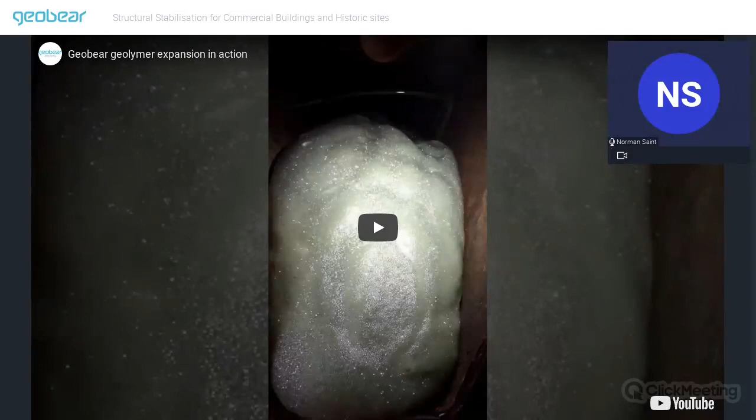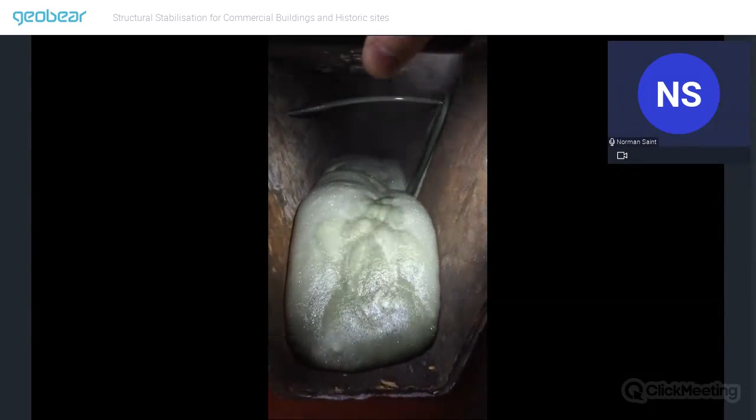There's the geopolymer, and it's what we call the liquid state, and there it starts creaming. And then we get that expansion. It's that expansion that you can see there that runs into the voids on the loose ground. Obviously, that was free rise. In its captive state, it becomes more dense. So it's only a short video, but it shows how the geopolymers work.

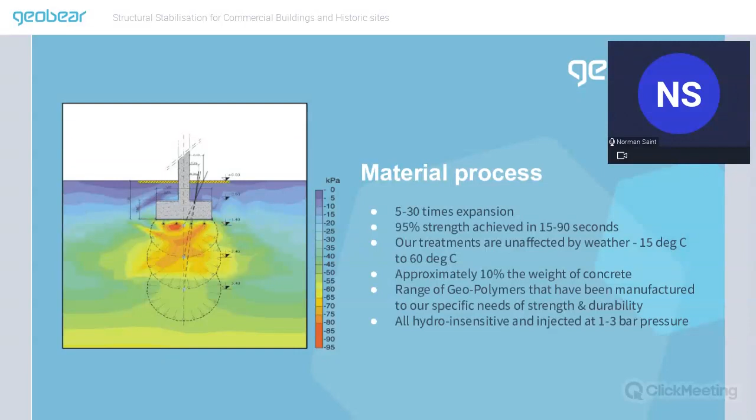On this particular project for the silo, we were given a specific target strength of 20 kilonewtons per meter squared to achieve by the client. The target depths we identified at 3.5 meters below the foundation. And on this project, we would verify that the ground improvements has been achieved by a heavy dynamic penetrometer test, or we could do various other tests, core samples, etc., depending on what the clients have specified.

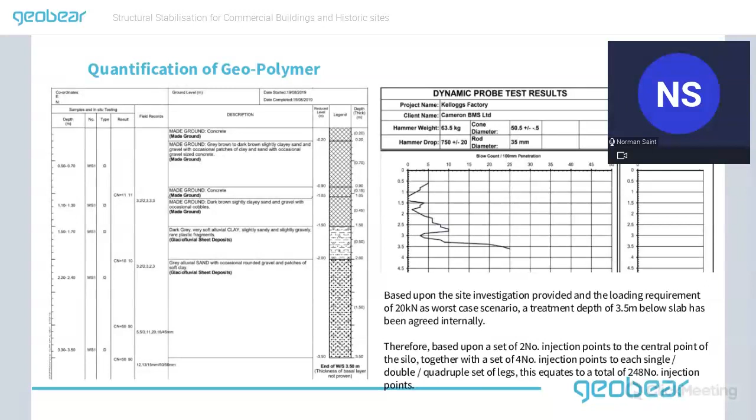But as you can see, that's typical site investigation. I'm sure you've all seen them before. On the left side, we've got the depths of the treated soils with a description of what the soils are. And on the right, we've got the dynamic probe test results pre-works. The post-works obviously would have been much stronger than that. So that's a typical SI that we'd ask for on most projects, not all projects, but ideally we would like this. And it helps us form our design for the projects that we work on.

Here's our first project, which, as we mentioned before, it's Seaton Delaval Hall. This is a grade 1 listed country house on the coastline in Northumberland. It's situated between Seaton Sluice and Seaton Delaval, if you're familiar with that area. And it was designed by Sir John Vanbrugh in 1718 for Admiral George Delaval, hence the name. It's now owned by the National Trust and more recently has been open to the general public.

Over many years, beneath the hall, the soils have been compacted beneath the structure, and also leaking drains had softened the soils, washing away some of the fines. A solution was required that would remediate these soils without any excavation or damage to the historic building. And following a number of engineering meetings, which I was involved with, a detailed proposal was delivered by Geobear, and our non-intrusive geopolymer injection was chosen.

We were required to improve the strength of the ground beneath the foundations to the west wing of the historic house, where significant cracking and movement, both internally and externally, could be seen. The site investigations revealed various treatment depths ranging from 1.5 to 7 meters below ground level. And our geopolymer material was injected at 1 meter intervals around the affected areas.

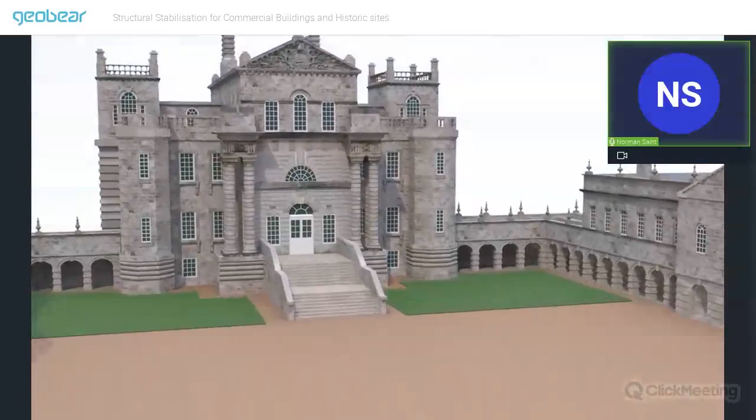There we go, and there's the colonnades, and the treatment beneath those was 7 meters. Then we went round to the rear of the building.

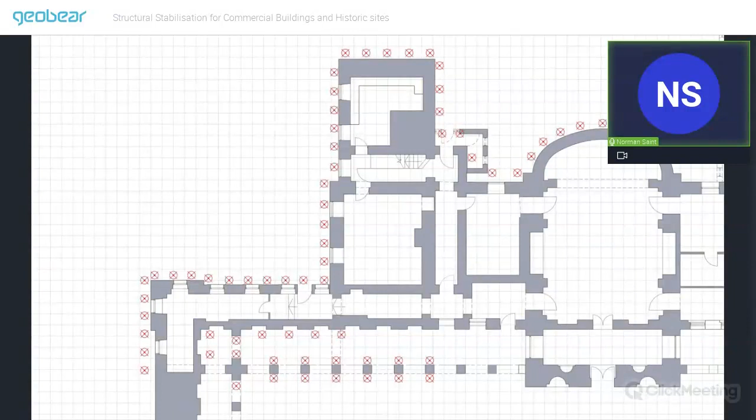There we go, you should see the injection points being laid. There's each injection point, and they were spaced at 1 meter intervals around the property.

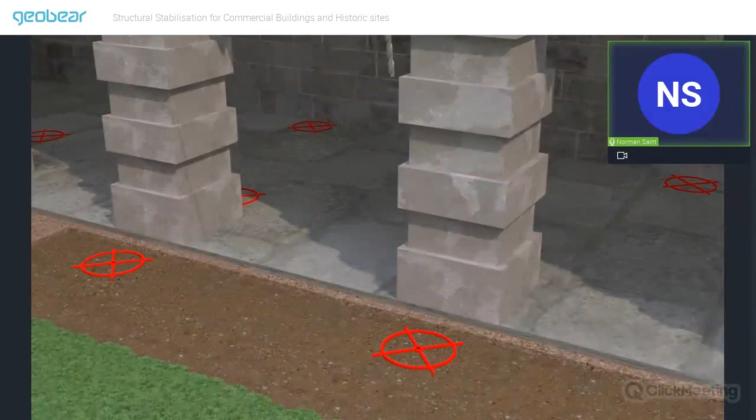Every hole that we do is logged and checked, so you get a full detailed report at the end of every injection. There's a 16 millimeter hole injected down through the floor. They would go down, in this case, to 7 meters.

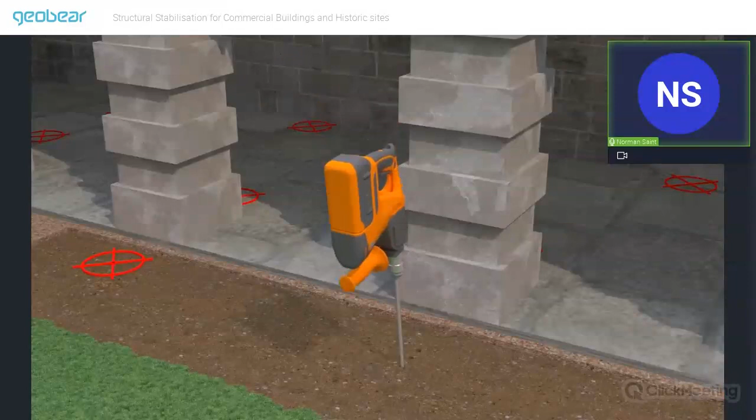As you can see there, how non-intrusive our process is. And there's the 12 millimeter steel injection tubes.

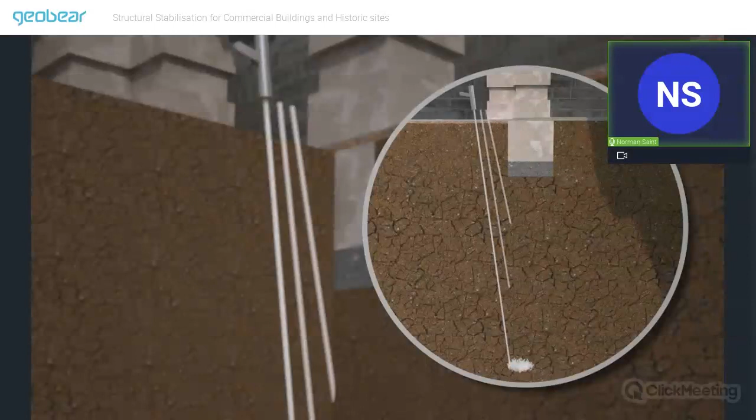There's an animation now, which is not too dissimilar to the way the process works. There's the geopolymer going in, and you can see how it fills the micro voids and the voids beneath. If you picture that as expanding, it becomes denser every time, so all around each treatment area, the resins and pressures are pushing out in all directions.

Eventually, on the last one, here we go, we're directly beneath the base. And there we go, we've got a pure column, and that went down to 7 meters below each one of those bases of ground improvement.

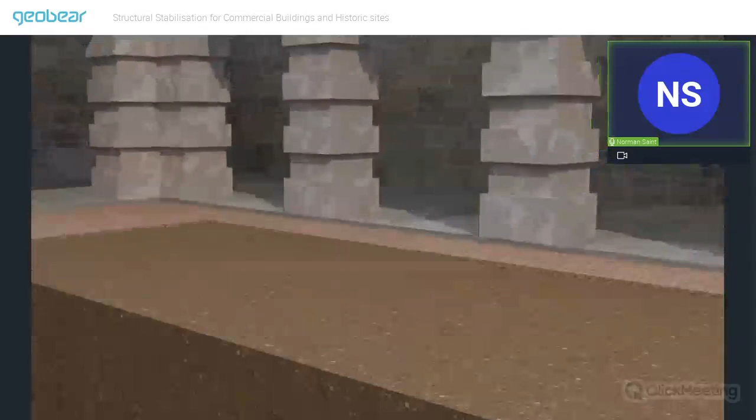You see how little we've affected the surrounding soils away from the structure. So you're only paying to treat the areas that have been affected, and you're not disturbing other areas.

So that was a great project, we're extremely proud of that one. As I say, that got us nominated for the GE Awards down in London.

I think we've got another video now of a project we did at Eton College.

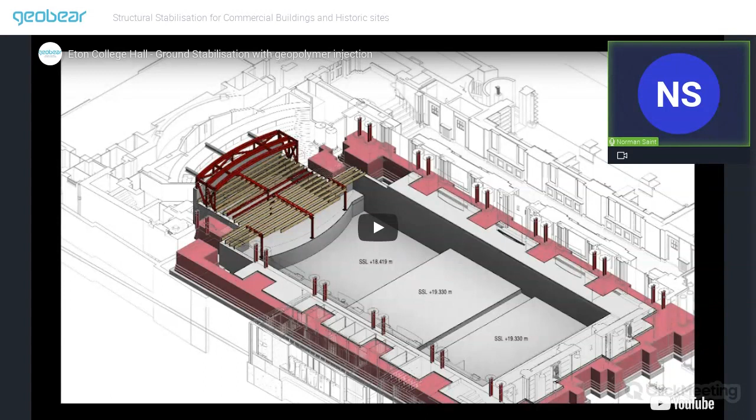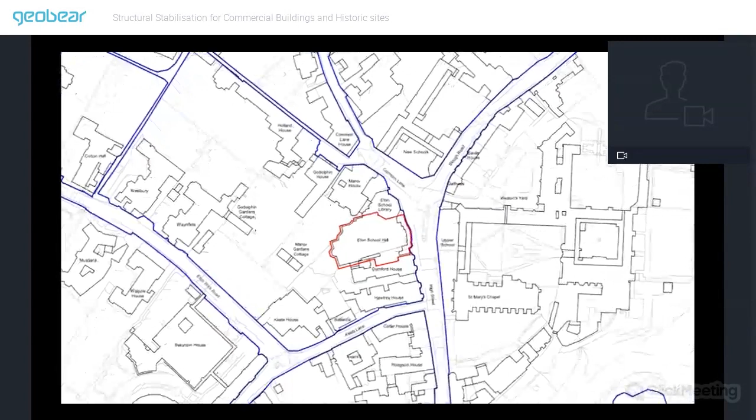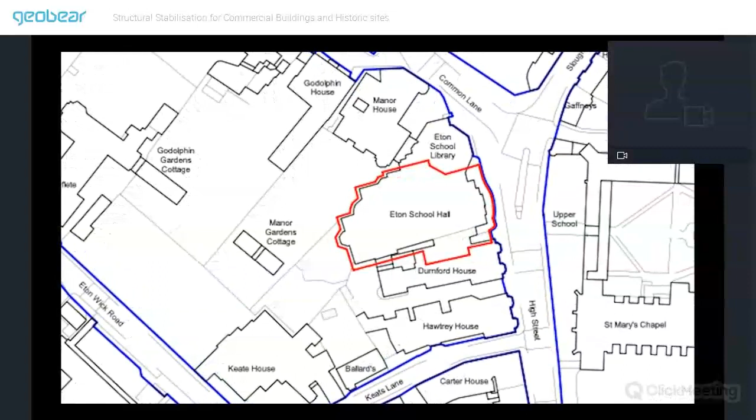The works we were asked to look at were part of a wider scheme, which involved the demolition and replacement of the external structures between Durnford House, a boarding house for the students, and the school hall and the college memorial buildings.

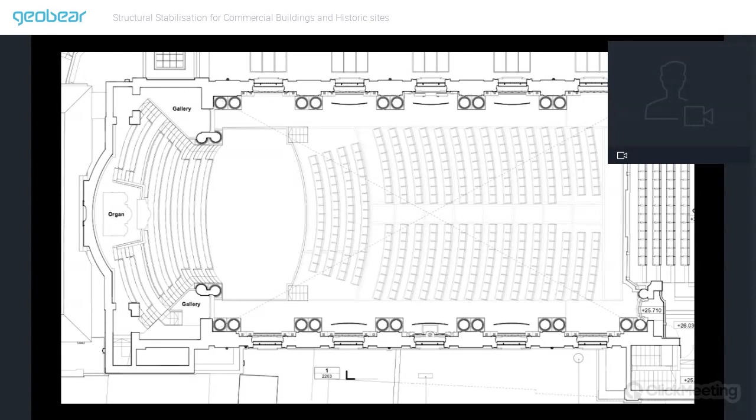Primarily, it was to refurbish the inside where they had a lot of asbestos which needed to be removed, but also to install a hydraulically operated floor, which meant the floor could be lowered for various functions and then reinstated afterwards to give them more floor space.

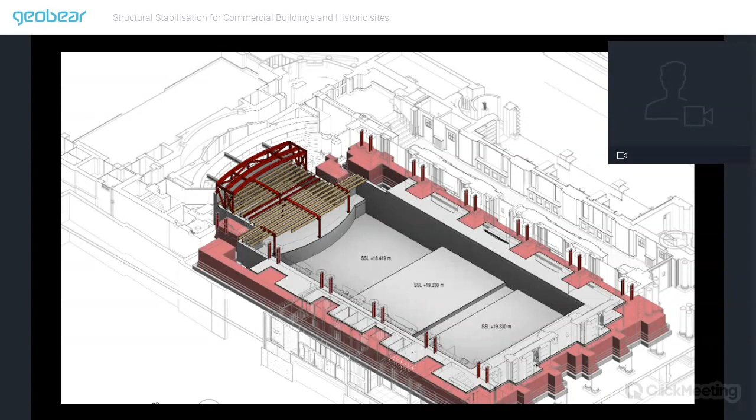The area of existing basement in front of the stage is being lowered by, I think, 1.2 meters to accommodate the lift for the floor.

There you can see, prior to demolition, the existing school hall floor. Underneath that, there's a series of vaults and a basement. When I say a basement, it's about 1.2 meters high in headroom.

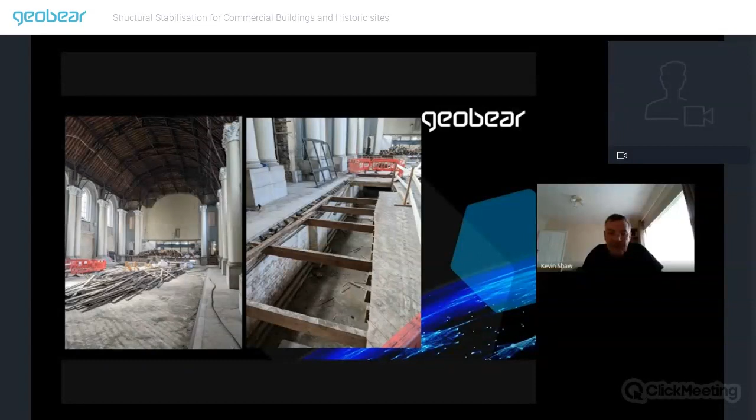So the proposed construction involved reducing the level of the basement. However, where the foundations of the columns came down, there was concern over load transfer into the excavation, i.e. the zone of influence beneath the existing foundation projected into the proposed dig.

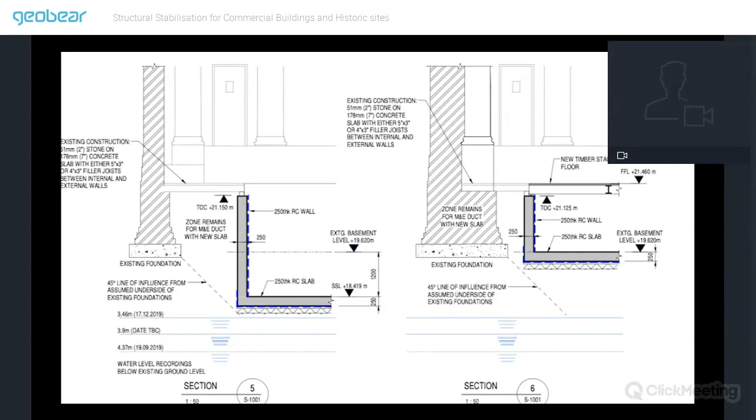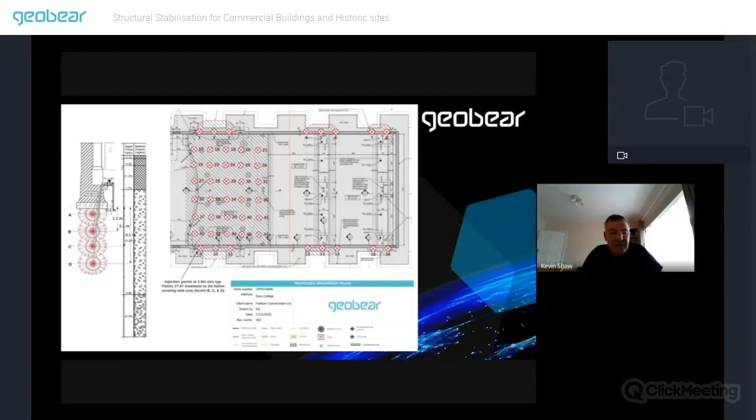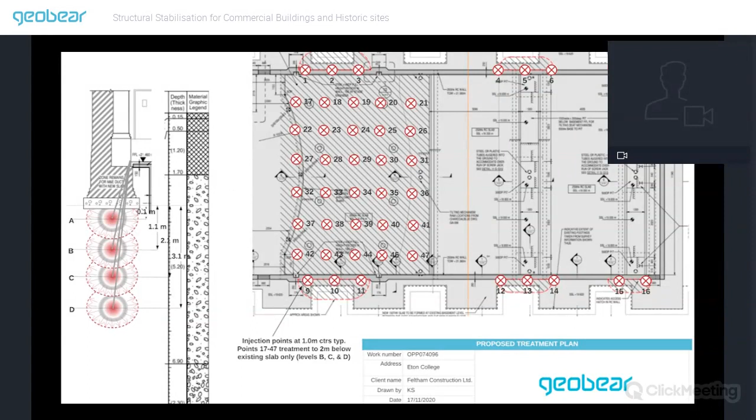So we were asked to grout, or the engineer came up with a grouting scheme, and we offered an alternative with geopolymer to inject beneath the existing foundation to remove the load or the potential for load transfer into the excavation. In addition, the water table is very close to the underside of the proposed slab, so they asked us to inject into the area to be excavated to stop the potential of any groundwater ingressing into the excavation.

There were 6 columns with associated foundations on the perimeter of the excavation, which we needed to treat to increase the angle of internal friction and to remove the potential for load transfer into the excavation.

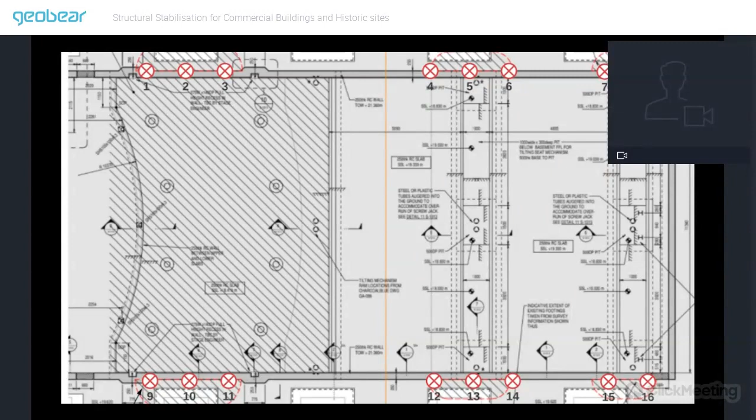And then there was an area where they were reducing the level in front of the stage, where we injected beneath the existing slab down to a level to permit the excavation and installation of the new floor slab and walls.

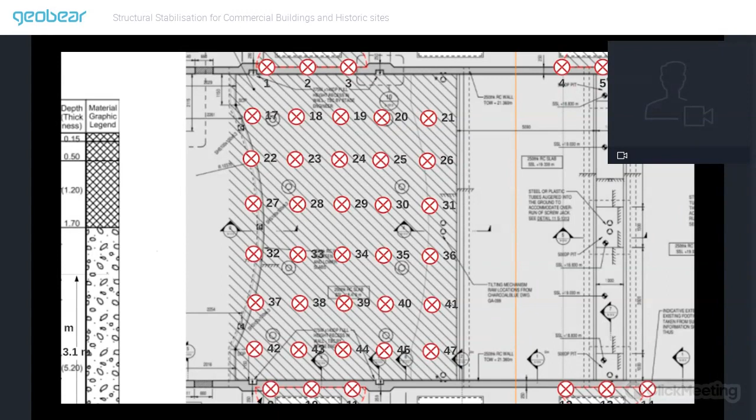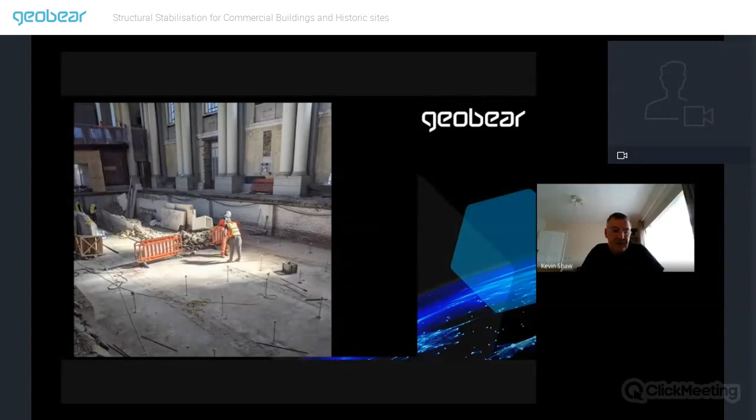We're approximately 75 meters away from where we were injecting. As you can see, we were able to work around the demolition of the existing basement, installing the tubes for the injection beneath the existing basement slab.

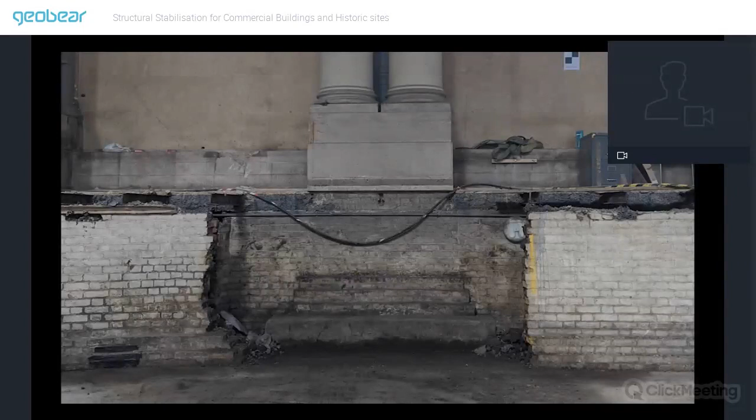This is a photograph of the foundation beneath the column that was exposed after treatment, and you can see the stone corbel, which we drilled through and treated the ground beneath.

The markers on the wall are for precise level survey, so when they excavate it, they'll be able to monitor any movement of that column.

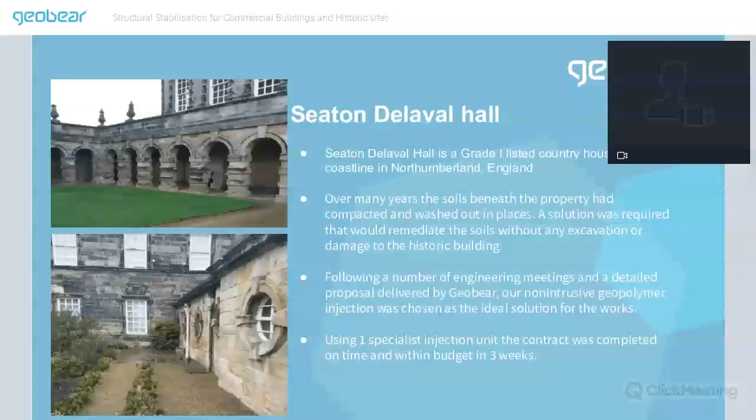It was a really good project, that one that Kevin just talked about there. We've got a number of different methods for our geopolymer. We've got water retention, we've got soil retention, we've got ground improvement.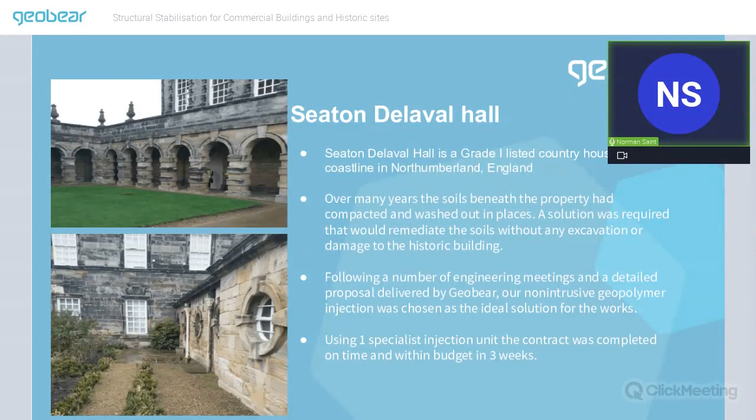And we've got ongoing works with a live renovation of a good historic structure there. We'll talk about another couple of projects. This one is a church, so not as thrilling as Seaton Delaval Hall, but still nonetheless it's exciting for the way that we worked on it.

The damage to the church was on the west gable and has been caused purely by clay shrinkage. Sorry, that's the wrong script. Bear with me one second.

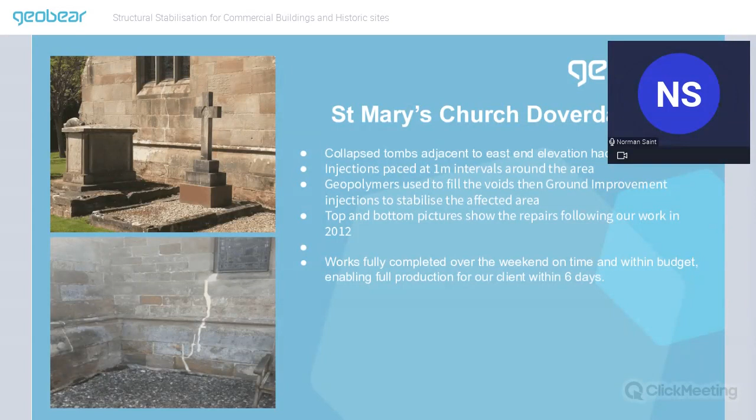If we completed this repair using the same method, or the same geopolymers, as the east gable, where we done the void filling. The whole process would totally fail otherwise. As I mentioned earlier, we've got specific resins for individual problems, and this time we'll use our geopolymer specifically designed for clay shrinkage.

The yew tree will remain in situ post-works. That's an extremely old tree, at least a couple of hundred years old. We're not allowed to remove that tree or affect it, and our resins will not affect the roots or the life of that tree. This project illustrates that one geopolymer does not fix all faults.

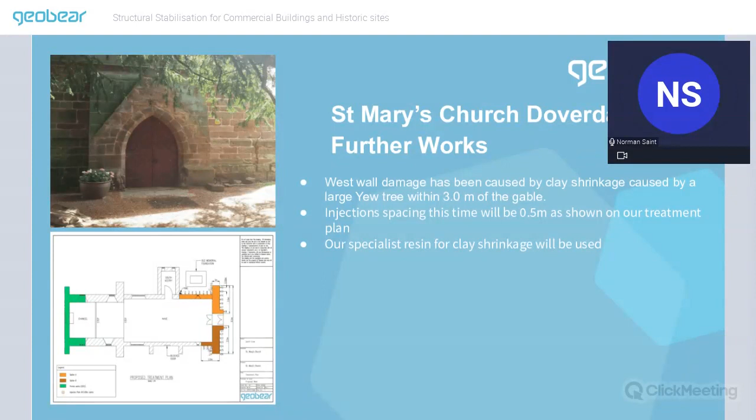Here's another project: Stonyhurst College in Lancashire, a co-educational Roman Catholic independent school. It's also, like our other projects, a Grade 1 listed building that has suffered from historic movement. The site investigation showed poor soils down to 4 metres below ground level.

Our treatment depths were targeted to 3.7 metres below the foundation base. This fabulous building was returned to full use following refurbishment, and our non-destructive process was chosen over traditional piling, as that would have disturbed the building even more. A strong, traditionally piled repair on ground like that shown by the site investigation would have caused further damage and movement to the structure.

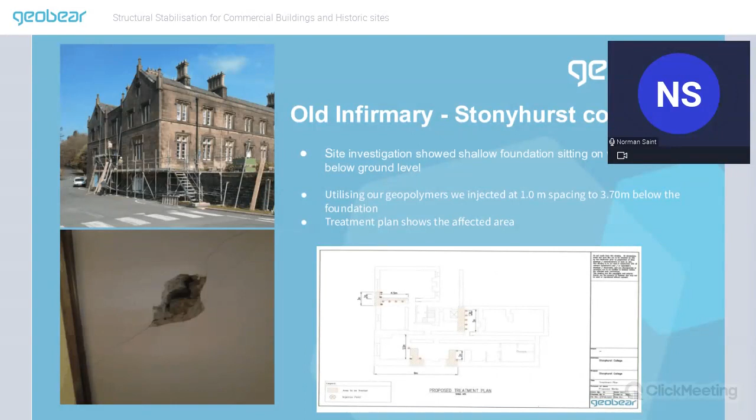Our next project is Dumbarton Castle up in Scotland. Apparently it was a French prison - I'm not quite sure why there's a French prison up in Scotland, but that's another story. This project shows how versatile and adaptable Geobear can be to reach difficult projects. The structure is situated at the top of Dumbarton Rock with no vehicle access whatsoever.

The structure at the top had settled 15 millimetres and was 145 millimetres from vertical. The building was constructed on top of a stone foundation, 1.2 metres below ground level. Water draining off the rock face over the rear of the building had caused differential settlement. Geobear's objective was to stabilise the wall without disturbing the building, and all the work was completed successfully without any disruption to the tourist attraction.

Access for this site was extremely difficult - the only route was by climbing 218 steps, and believe me, I felt every single one of those steps climbing up. It's 55 metres high from ground level.

Each injection specialist unit has a 100-metre hose, but in this instance the nearest we could park our injection unit was 210 metres away. Our specialist teams at Geobear adapted our equipment so we could reach the area to be treated, which was 55 metres up from the ground.

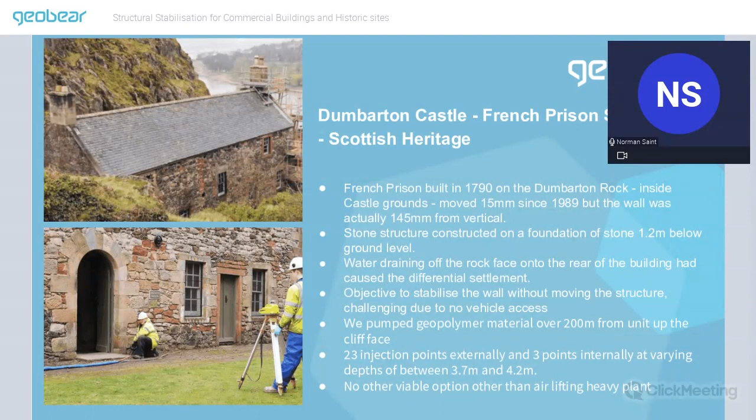Access, trust me, was extremely difficult. Traditional piling would have been impossible. Traditional underpinning, I'm not sure how you'd have done it, how you'd have got a cement mixer up there, to be quite honest. I don't know how you'd have done it. So it was a great project for us.

Now, another one, this is slightly different. This is void filling. It's on York City walls. It's one of my favourite cities, York. I love it.

The walls remain the most complete example of a medieval city wall still standing in England today. And they date back as far as the Roman period.

With such historic pedigree, both construction and age-related wear and tear was inevitable, and some significant voiding was discovered beneath one of the sets of steps leading up to the rampart of the Monk Bar Gatehouse.

The voiding beneath the steps had begun to impact on the stability, causing the steps to loosen, with the potential for them to collapse. Not only would this have been dangerous for health and safety, but it also impacted on the historic appearance of this much visited tourist attraction.

York City Council, who managed the walls, required a permanent solution that would effectively fill the void beneath the steps, both stabilising and supporting them. Yet any such solution had to have its methodology and materials passed by historic buildings.

This was a long-winded project, as you can imagine, but we managed to get approval from historic buildings. They would have no detrimental effect on the steps of the wall, so that basically our geopolymers would not affect any of the surface of the wall that were there.

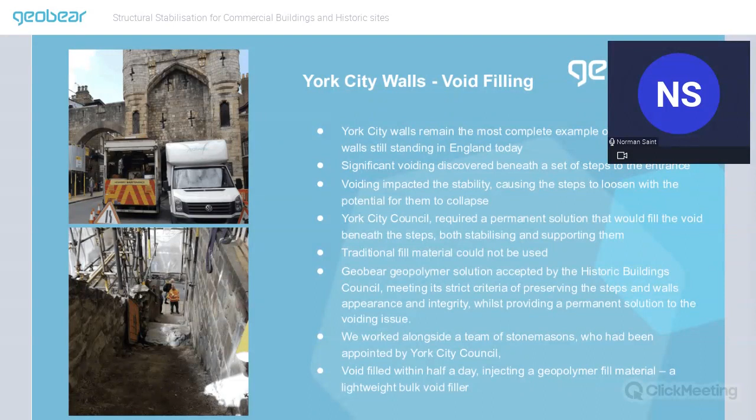Yeah, thanks, Norman. That was an excellent insight into how we deal with historic structures. There's a chat box at the bottom of the screen. I think I can see some questions have come in already, so we may as well dip straight into those. Ian asked at the top of the chat, what centres for investigation boreholes would you require for a strip foundation?

A strip foundation depends how long that treated area is, Ian. So say, for instance, we're talking of a 10 linear meter treatment, usually one site investigation or borehole would be sufficient. If we're going around the corners, and both corners are moving, we would like an investigation under each corner. It depends on the severity of the damage, really. But usually on a job of 10 to 20 linear meters, 1 to 2 boreholes will be more than enough.

Okay, thanks. Hopefully that answered that for you, Ian. Steve asks, of East Riding Yorkshire Council, were you asked to apply for listed building consent for your works?